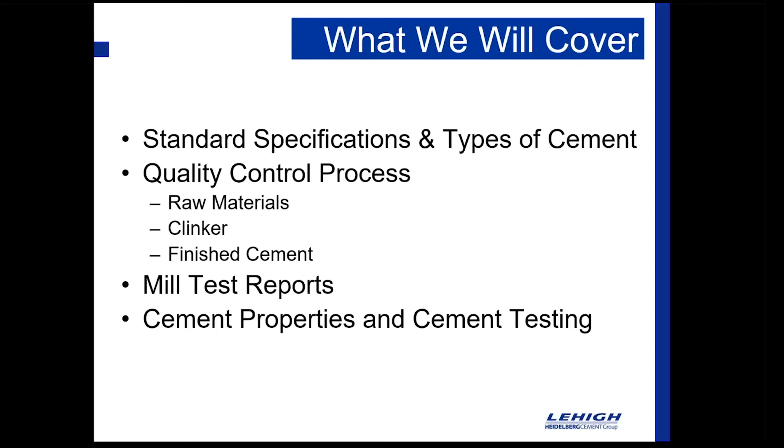So today, what are we going to cover? We're going to talk about standard specifications and types of cement. We're going to walk through the quality control process at a cement plant. And that's going to be kind of a 30,000 foot overview. And then I want to get into mill test reports just a bit and kind of break those down so that everyone can see the cement properties and cement testing involved in what comes out on that monthly mill test report that you might receive from your powder supplier.

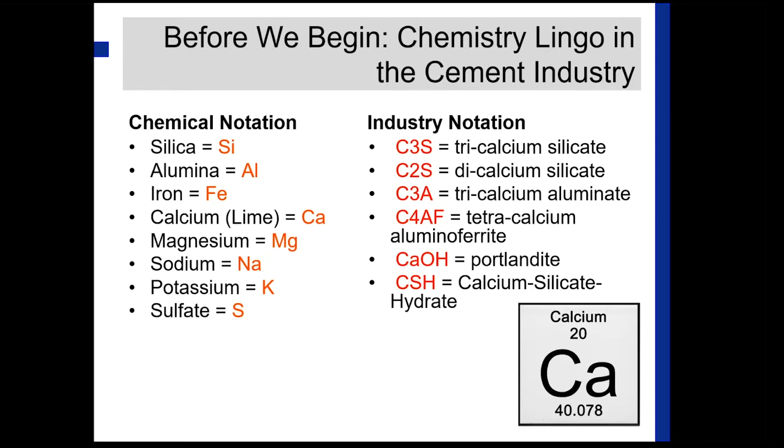Okay, so to get us kicked off, got a quick quiz. Portland Cement: A, was named after where it was first made in Portland, Oregon. B, was named after the hometown of the man who first patented it, who lived in Portland, Maine. Or C, got its name from a stone it resembled on the Isle of Portland off the British coast. And so if you said C, you are correct. Portland Cement gets its name from a stone it resembled on the Isle of Portland off the British coast.

And so with that, we'll jump right into standard specifications and types of cement. And to do that, that means we're going to step into the world of ASTM for a bit, specifically going to look at ASTM C150, the standard specification for Portland cement, ASTM C595, the standard specification for blended hydraulic cements, and then ASTM C1157, the standard performance specification for hydraulic cement.

So as we look at the different types, starting with C150, ASTM defines Portland cement like this: a hydraulic cement produced by pulverizing clinker consisting essentially of hydraulic calcium silicates, usually containing one or more of the forms of calcium sulfate as an interground addition.

Now, at the end of the day, I'm a pretty simple guy, and I understand things best when I can put it into street language. So what ASTM is telling me here is that Portland cement is a powder made from grinding clinker and gypsum, and that powder gains strength when it gets wet.

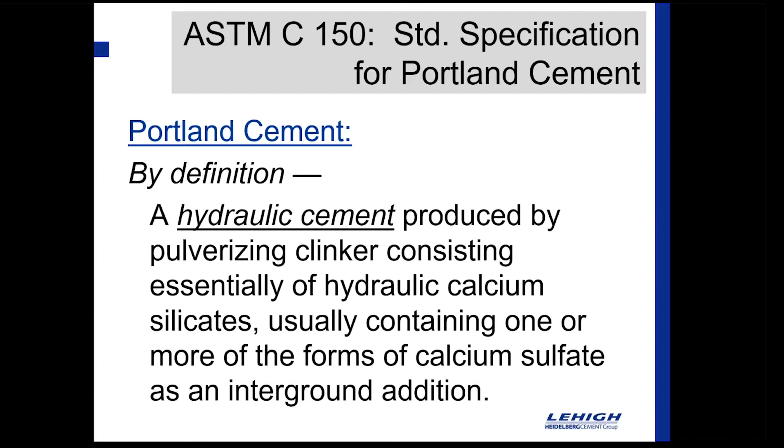Within C150, there's 8 main types of cement, and we also have, in addition to that, type 1-2 cement. So we have type 1 cement, which would be called normal cement, type 1A, normal air entraining, type 2, moderate sulfate resistance, type 2A, moderate sulfate resistance air entraining, type 3, high early strength, type 3A, high early strength air entraining, type 4, low heat of hydration, and type 5, high sulfate resistance.

I've been with Lehigh 32 years. When I first started at our Mitchell plant, we did make an air entraining cement. So what that meant was when you bought the powder, you didn't have to put air entraining admixture in - it already had that built into it. But as specifications became more diverse and there were different air ranges you might want to provide concrete to meet, that kind of fell by the wayside. It's probably been 30 years since we made a 1A cement here at Mitchell. So you don't see those much anymore, but it's still something that's discussed.

So these are the 4 main types of cement we might see in this Indianapolis, central Indiana, southern Indiana, northern Indiana area: type 1, type 2, type 3, and again that type 1-2 cement that offers the performance of both type 1 and type 2. So those would be the main ones that we would deal with.

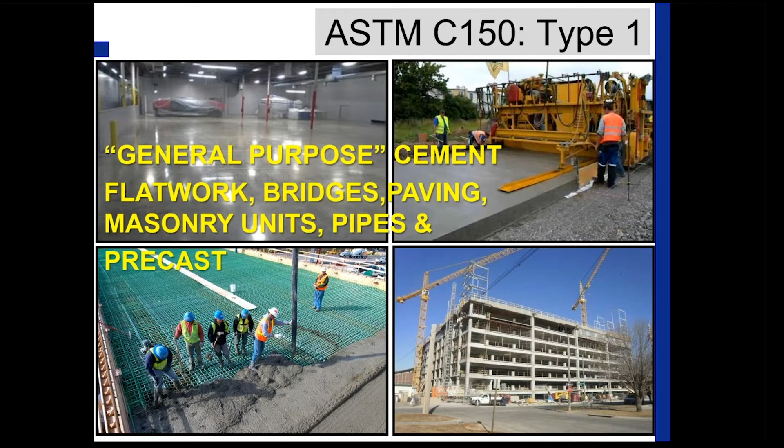Just looking at some general applications for some of these cements to refresh our memory. Type 1 would be more of a general purpose cement, used in flat work, bridges, paving, masonry units, concrete pipe, precast. Any of those applications might be suitable for a type 1.

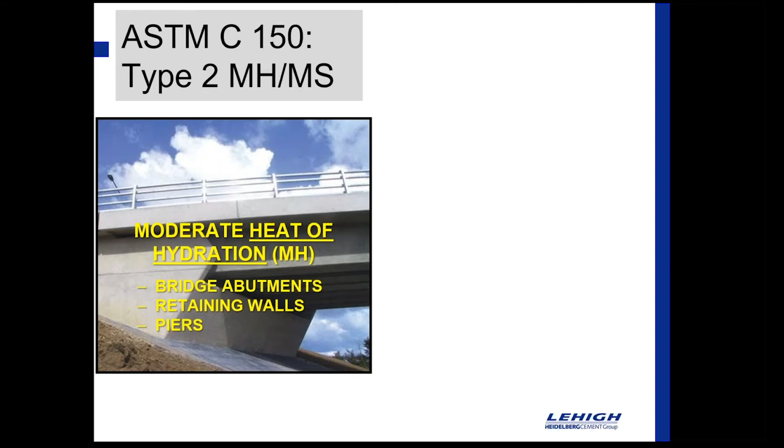In terms of type 2, it can be a moderate heat or a moderate sulfate cement. For moderate heat, you might see that in bridge abutments, retaining walls, a concrete pier, something like that, where you're getting into more of a mass concrete situation. But you might also see a type 2 specified on a project where you need moderate sulfate resistance - any kind of drainage structure, sewage treatment facilities, wastewater treatment plants, something of that nature might call for a moderate sulfate cement as well.

And when we're talking about type 2, typically we start to think about that C3A, the tricalcium aluminate phase. The content of that C3A is the main control factor with type 2, and it's limited to 8% maximum. We'll unpack that when we get to the mill test section.

Type 3, high early strength cements, absolutely something we're starting to see now put into application this time of year with cold weather concrete. Also a lot of precast pre-stress where forms need to be removed quickly. Post-tension concrete could be a type 3 use. Any kind of pavement that's fast track or a high traffic area that needs to be put back into service quickly, or a lot of times we'll see even concrete masonry products, especially when that has to be turned around quick or we're concerned with chippage on corners or fine detail work - that might be a place for type 3.

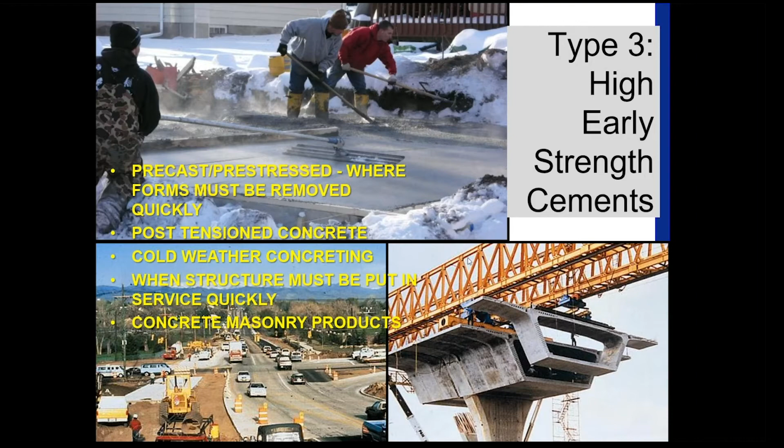And then type 4 is a low heat cement. This is a situation where we're concerned with the heat generated from the overall mass of the concrete, where thermal cracking becomes an issue. We can limit that amount of heat generation by the use of a type 4 cement. Bearing in mind that mass concrete, according to ACI 301, suggests that a concrete member with a minimum dimension of 4 feet should be considered mass concrete.

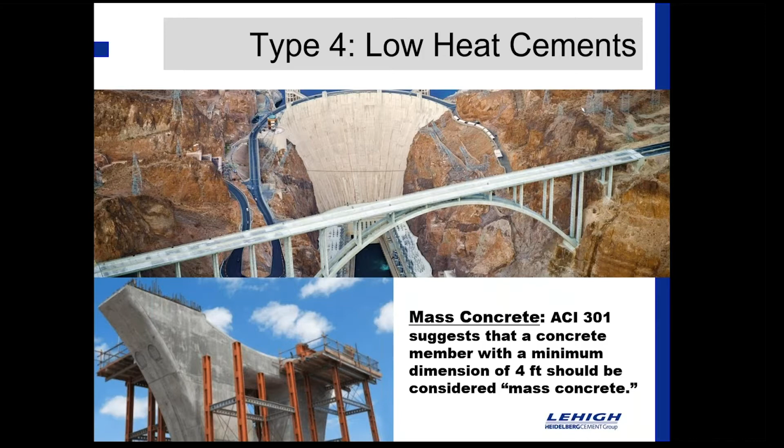Type 5 is a high sulfate resistant cement. This would be something that would be especially prevalent in the Southwest United States, where there's an abundance of sulfate in the soil. Could be something used around saltwater where we might have exposure in that environment.

And I take that pretty seriously. So here's a picture of my wife and I. And if you've ever been to Key West, I bet you got a picture just like that where you're at the southernmost point. And if you've ever done that, you know that there's a really long line to step up there and get your picture. Like we waited almost an hour and a half in the heat down there one day to get our picture.

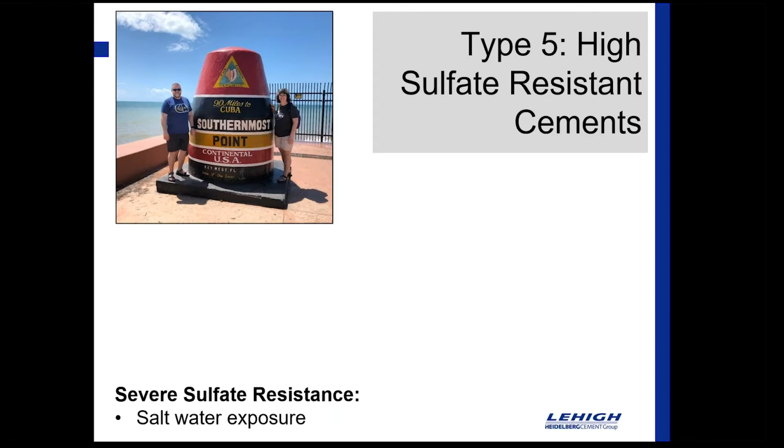So if you're also like me and you're kind of a concrete nerd, you spend a big part of your vacation walking around with either your head down looking at the concrete or you're looking at the concrete poured around you. And so that's what I'm doing as I'm standing in line. And so what I found was that the overspray, when the waves get kind of stirred up and it can get a little rough around this southernmost point, you could see on this concrete light pole where the expansion started to really kick in, and they tried putting metal bands around that to hold it in the best they could, but there was entire sections where the concrete was just gone.

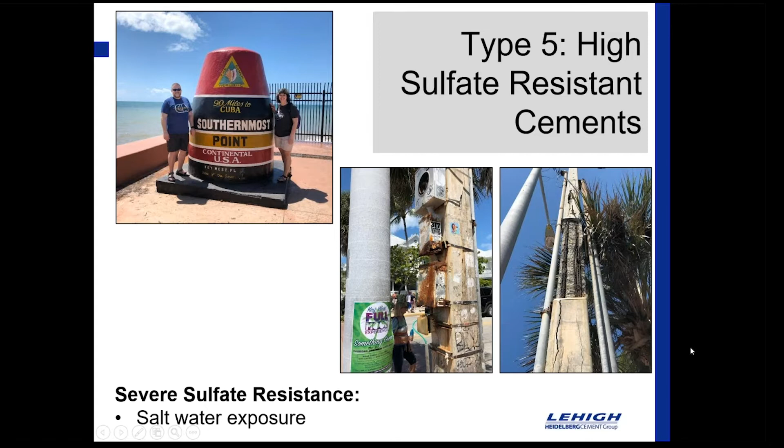The good news is they're replacing those. You can see there, on the pole on the left of the first picture, that they're actually trying to replace those. So I don't know how many times I've run into buildings because I've walked around with my head down, but if you're like me, you've done that before.

Just real quick while we're in the neighborhood, thought I would just mention white Portland cement. And you can get a white Portland cement in either a type 1 or a type 3. And the whiteness is a function of chemistry primarily, very, very low iron content. It's a special process, a special kiln. Not every cement plant can do that. So it tends to be a little more expensive because it's a matter of scale and a little harder to get. So it's a supply and demand issue. But again, just a function of the iron content, and we'll talk about why that would be the case here in just a bit.

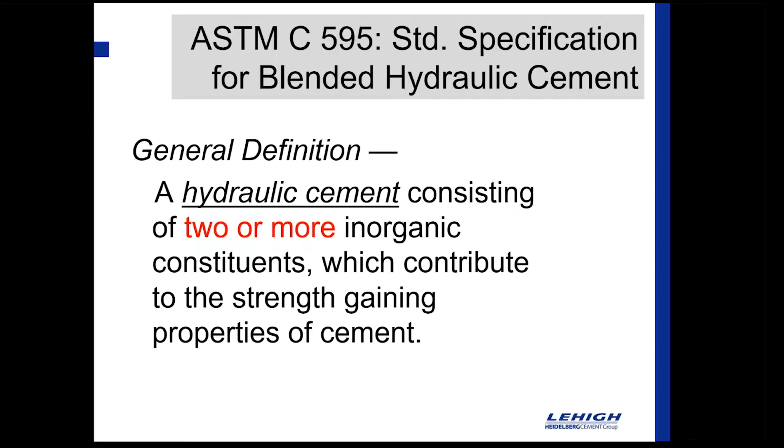Okay, so let's step into ASTM C595. That's the standard specification for a blended hydraulic cement. And the text definition says a hydraulic cement consisting of 2 or more inorganic constituents which contribute to the strength gaining properties of the cement. And so when we're looking at C595, we could be combining our clinker with gypsum, Portland cement, limestone, fly ash, slag, silica fume, calcined clay. So we're taking 2 things now from an inorganic perspective and blending those or intergrinding those.

And why I think it's significant to do that from a cement producer perspective is because when we make it on our end, when the cement producer makes this blended cement, we're optimizing the SO3 content. And that's really important because the SO3 that cement brings to that concrete mix, I think it helps us to understand we're talking no longer about constituents, we're talking about a system. So our concrete becomes an overall system where there's different components working together. And so the cement brings SO3 to that mix when all those things go into solution. And we're asking that SO3 to control a lot of different reactions. And so the cement producer is going to optimize that SO3 content on his end. And that is something I think that's going to be of benefit to controlling consistency of mix performance down the road.

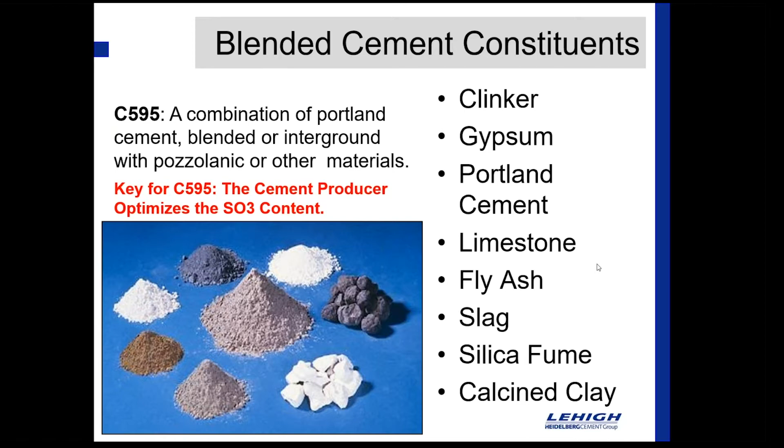Looking at C595, again, blended hydraulic cements for general concrete construction. There's type 1L, which is a Portland limestone cement. Type 1P, a Portland pozzolan cement. Type 1S, Portland slag cement. And type 1T is a ternary blended cement. So we can actually blend more than those 2 items.

And I wanted to just take a second and talk a bit about type 1L Portland limestone cement because unless you've been living in a cave for the last year or so, it's become more and more prevalent to hear about the green world. And so green concrete is a part of a greener world that we're all living in. And so I wanted to talk about a way that we can address that from our industry. So looking at Portland limestone cements, they are, again, called out by C595 and AASHTO M240. To make a Portland limestone cement, you can have a limestone addition rate of 5 to 15% limestone.

They've got a pretty long history of use, started in Europe in the mid-60s. Canada kind of jumped on board around the start of the 2000s. And then the US jumped in earnest probably sometime between 2005, 2010, but really very prevalent from 2010 on.

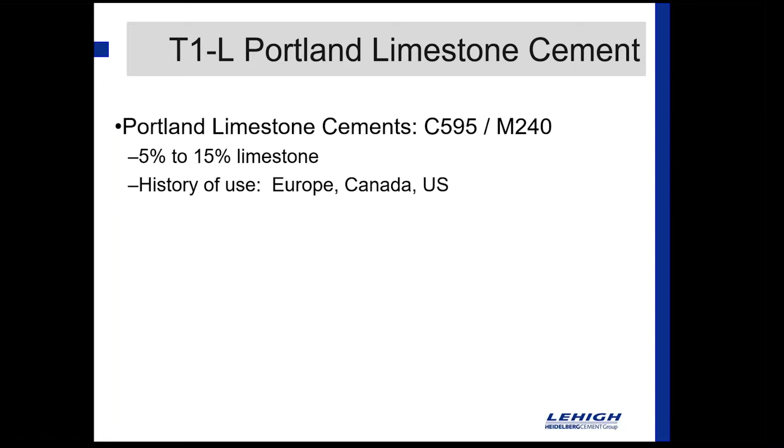There's a few different mechanisms as to why Type 1L Portland limestone cement works. Three of the primary are particle packing, nucleation, and chemical reactions. And when you use a Type 1L cement, what we have found from our testing is that you can pull a Type 1 or a Type 1-2 cement out of your mix and typically replace that at a 1-to-1 rate with a Type 1L, and you're going to see equivalent or perhaps even improved performance in just about every category that would be of concern to a producer.

And really, the highest benefit, I think, going forward is that using Portland limestone cement provides an option to make greener concrete. There's a potential for 10% reduction in CO2, and that's all accomplished without any special system or addition to a ready mix plant. There's no hardware that has to be installed or anything like that. It's simply swapping your powder out from a Type 1 or a Type 1-2 and replacing that with the Type 1L cement, and you begin to realize that 10% reduction.

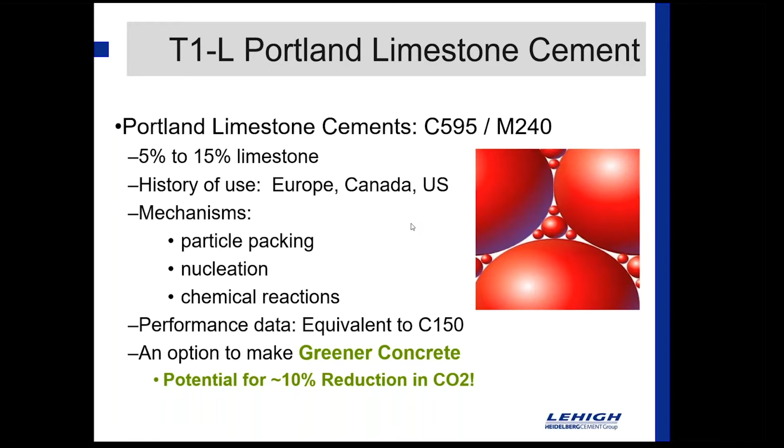And so you end up with a higher fineness material, but that higher fineness doesn't change the overall water demand or slump performance of that concrete. And a good benefit of that fineness increase is that the higher surface area of the fine limestone provides surfaces for silicates to form and grow through a process called nucleation. So essentially it gives more places for that hydration reaction to begin to start.

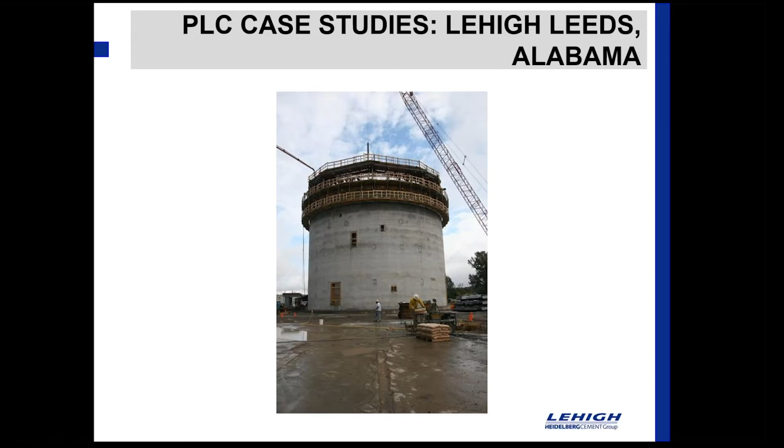Wanted to talk about a couple of case studies with Portland limestone cement. One is at Lehigh's Leeds, Alabama plant, and in 2008, we poured a new silo there. It was made out of a PLC slag combination. And so wanted to share some data from that.

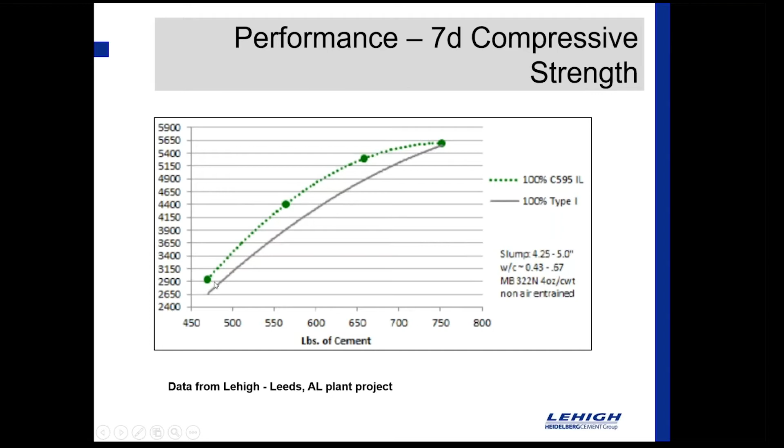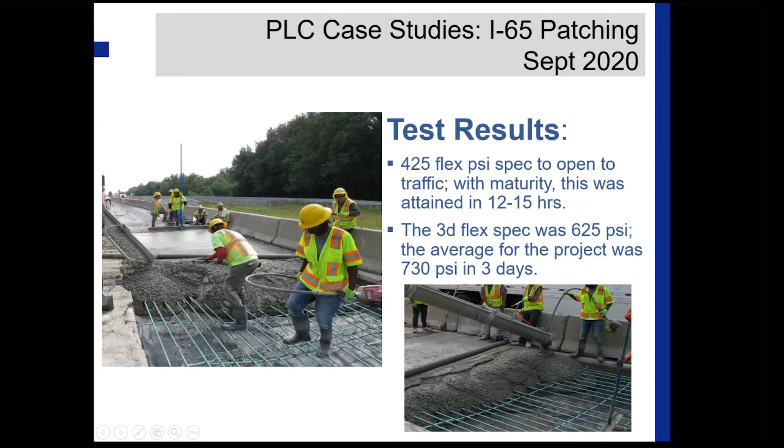A little closer to home, we had a project back in September of 2020, just a few months ago, on I-65 patching, where some Portland limestone cement was used, and that with some good performance, I think. So we saw a 425 flex PSI spec to open to traffic with maturity that was reached in about 12 to 15 hours. The 3-day flexural spec was 625, and the average for that project was about 730 PSI in the 3-day break. So again, I think you see a little bump on that early side that tends to be very beneficial with the Portland limestone cement.

And then just from Lehigh's perspective, I think most of you might be familiar with the fact that Lehigh's going through a $700 million expansion at our Mitchell plant. We're so confident in Portland limestone cement that about 95% of the structural concrete that's going to be placed for that is going to be Portland limestone cement.

And so I wanted to share some things that we've learned from some testing at our concrete lab in Mitchell, Indiana. And these are just some generalities that we've discovered, some trends across different testing, different plants' production, as we've looked at this from 4 different Lehigh plants now. So in terms of strength, again, a slight bump at 1 day. Typically, those tend to moderate a bit at 7 and 28 days and equal more of the Type 1 or the Type 1-2.

What's been interesting, water demand is the same as type 1-2 or even reduced a bit. And we've seen slump loss improved in most cases, and workability is extended. We ran slump loss out to about an hour and saw that typically showed some value or some promise there with the PLC. Set time at 70 degrees has been neutral within about a plus or minus 15-minute window versus type 1-2 cements.

Admixture dosages in terms of water reducer, that's been almost 1-to-1 straight up across the board. Air entrainment, because of the fineness of the PLC, you might need another quarter to half ounce, maybe something like that, of the air entrainer dosage rate. That may need bumped slightly.

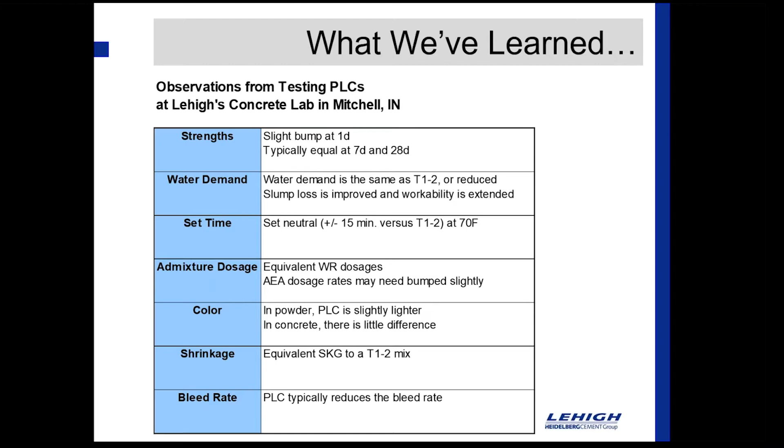Shrinkage has been nearly equal, dead on equal with the type 1-2 mix, and something that we found to be a potential benefit is the PLC typically reduces the overall bleed rate. Again, I think that's a function of that fineness that we see.

Would encourage you, if you haven't seen this, PCA has released a separate website called greenercement.com. So that's greenercement.com, and they have more information than you can shake a stick at here in terms of just overall PLC, why it works, why it can help with durability, resilience, and giving you that 10% carbon reduction overall. So great website to hang out, get a lot of questions answered if you have any more about PLC.

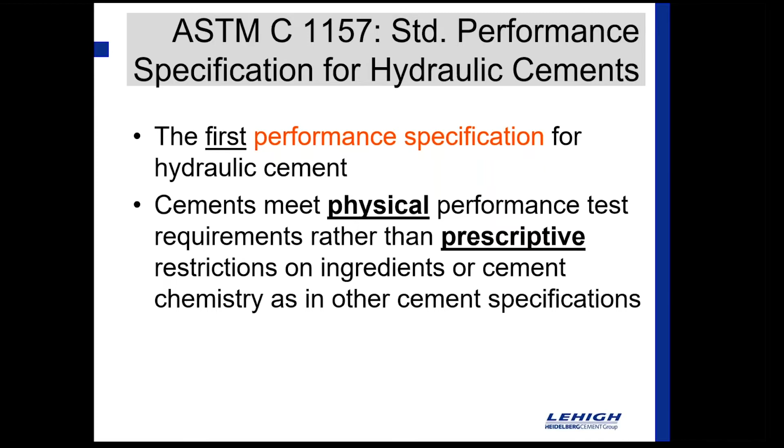Okay, so let's jump back into our types of cement, and we'll talk about ASTM C1157, Standard Performance Specification for Hydraulic Cements. So 1157 is the first performance specification for hydraulic cement, and now we're talking about a cement that meets a physical performance test requirement rather than the prescriptive restrictions that we're used to on ingredients or cement chemistry that we might see in C150 or C595. And so again, we have our 6 types. We've got type GU, which is general use.

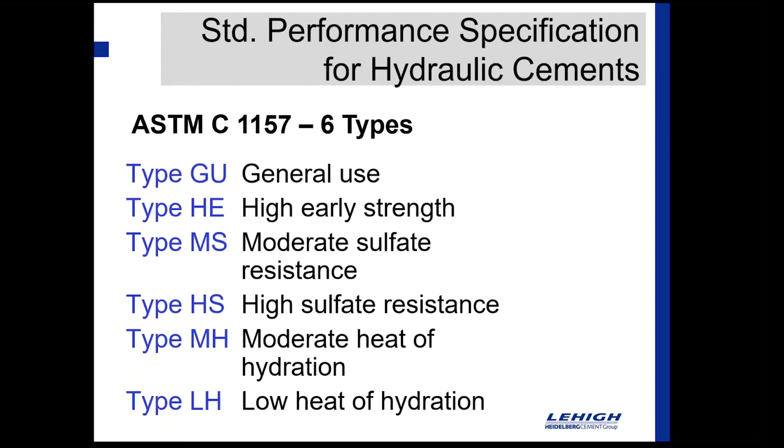And what you begin to notice is that the 1157 cements kind of have their C150 counterparts. So type GU general use is roughly equivalent in terms of performance to just our everyday type 1 cement. Type HE, high early strength, again, similar to the performance we would get from type 3 cement. Type MS, moderate sulfate resistance, and type MH, moderate heat of hydration. Again, that's your type 2 cements and so on.

And so we can kind of break it down like this, that when we look at C595 versus C1157 cements, C595 is prescriptive, so that specifies what the cement must be. In other words, there's going to be certain limits on chemistry or components of that chemistry that you have to maintain either over or under, and then there may be things like physical characteristics like the fineness limit that you've got to bear in mind as you're producing the cement.

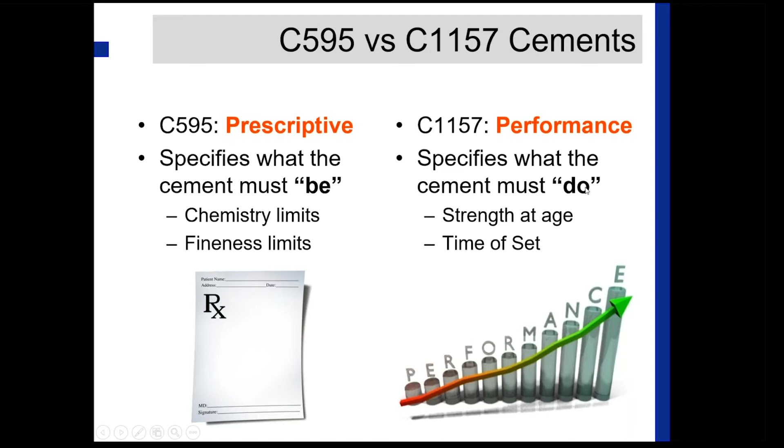But when you look at C1157, again, it's a performance specification, so that specifies what the cement must do. In other words, we don't care how it's made necessarily. We don't care what you had to do to make this powder to get it to do whatever it does. We just want to make sure that it reaches maybe a certain strength at a given age or a time of set in a certain time frame, whatever it might be. So it kind of frees up the producer to make a powder that's going to meet a certain performance criteria, not so much follow a cookbook recipe.

So I wanted to jump out of cements and look at quality control in cement manufacturing. Really, each step in this whole process is important in determining the properties of the finished cement. We start analyzing all the way back at the raw material selection stage. You go to raw feed, then to actual clinker, to the fresh cement, and then wrap up your testing with the shipping and field samples.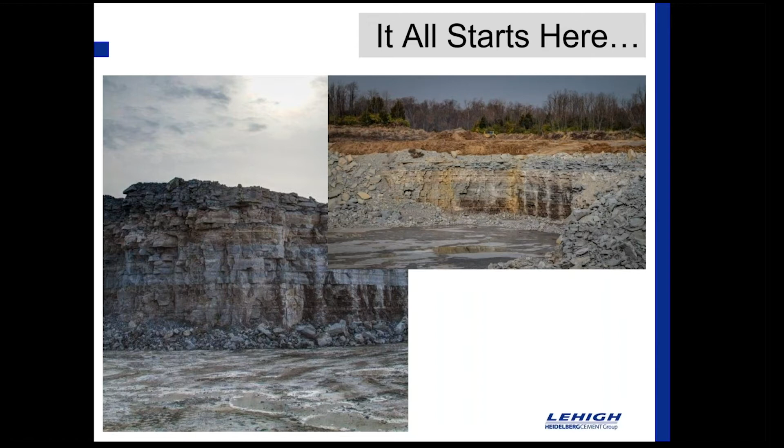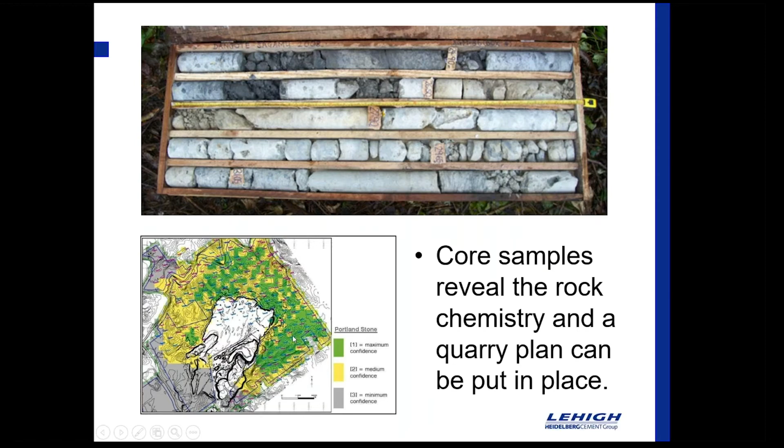One way that we do that is to take core samples, where they drill down through the rock and pull out these core samples, and that can reveal the chemistry as they go down through different layers of the sediment. And then a quarry plan can be put into place. You see at the bottom left here a map of a two-dimensional quarry plan, and that would be how the cement plant would choose to expand and bring material up for use in the cement manufacturing process.

Because of the evolution of technology, it allows some cool things. Now you can leave that world of the two-dimensional map, and you can actually make three-dimensional quarry maps. This can even allow for more precise mining and extraction of the limestone from the quarry, so that you get the material you need to make the quality of cement that you're shooting for.

Every time I give a plant tour, one of the questions I'm always asked is, can we see a quarry shot? Well, A, those don't happen as much as you might think, and B, there's no way that we can take a visitor there and be safe, at least while meeting our insurance quota. So what I've tried to do is bring a shot to you. This is a shot of a quarry.

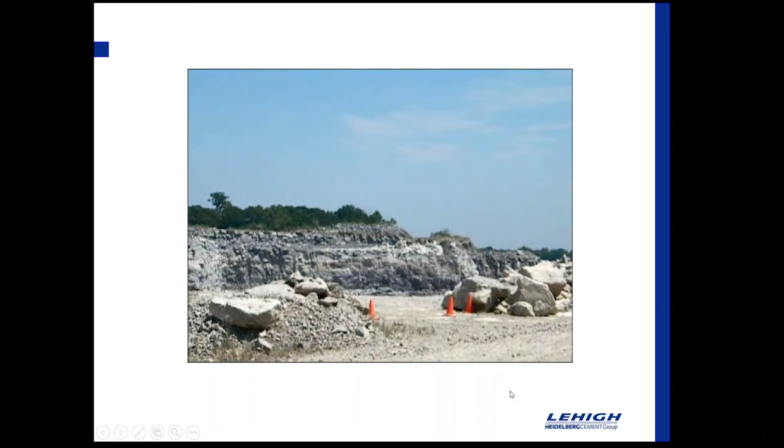I don't know if you can hear that guy saying do it again, but he's pretty fired up by the whole process.

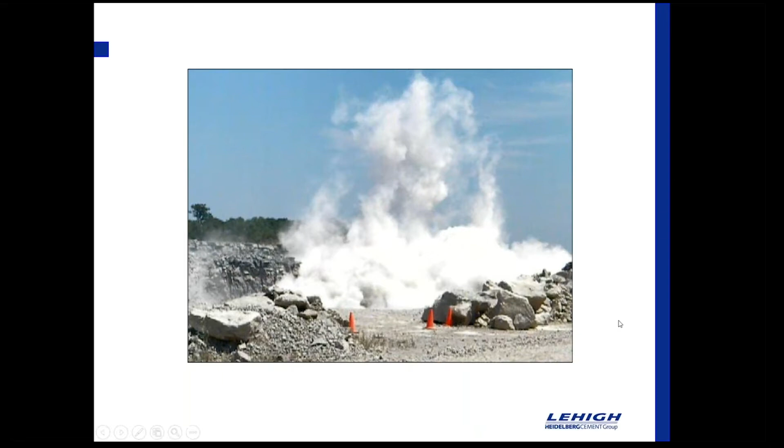Once we've got our limestone, that is the key ingredient to move us toward understanding the four principal oxides that make up our cement. There are four that are in particular needed. Calcium oxide, and these are just rough numbers, 64%. Silicon oxide is about 22%. Aluminum oxide, somewhere in the neighborhood of 6%. Iron oxide, about 3%. Those would be the major components that are required before you can make cement.

And then there are some minor components in the process: alkalis, sulfur, magnesium, and titanium. Where you get those four major components can come from a variety of different places. You might get your calcium around here. Like I said, primarily it's going to come from limestone. That's why you see cement plants in our area, because we're blessed with a lot of limestone deposits.

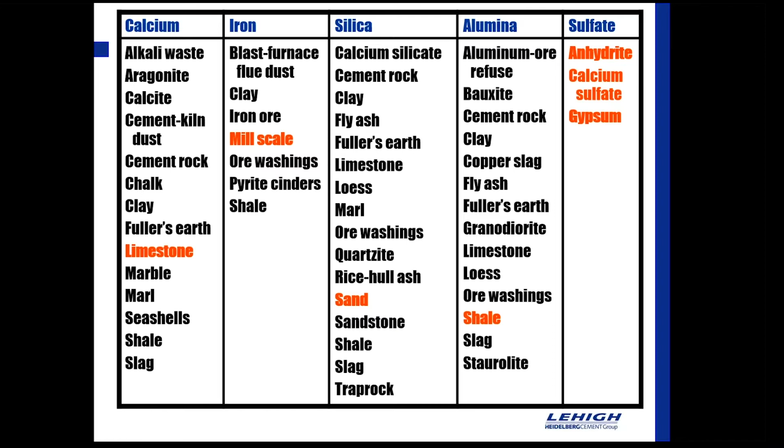Iron can come from different places. I've seen it come from pyrite and mill scale particularly. Silica, again, primarily sand. The alumina source, at least in the Mitchell plant, is shale. And sulfate can come from either pure gypsum, anhydrite, calcium sulfate, whatever that might be. You have to have that sulfate, and we'll talk about why in just a bit.

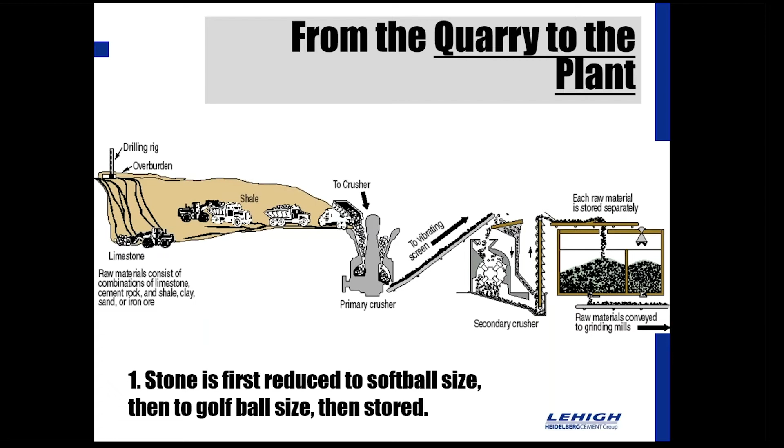When we take that rock from the quarry to the plant, we first reduce it to about softball size, then down to golf ball size, and then it's brought to the plant where it's stored. Once we have it stored at the plant, we take limestone, sand to give us the silica, something to give us our alumina source, and then an iron source. We take those four things and blend them. They're ground, and at that point we really start to control the chemistry. They're ground specifically to a fine powder, and then that material is ready to go into the kiln.

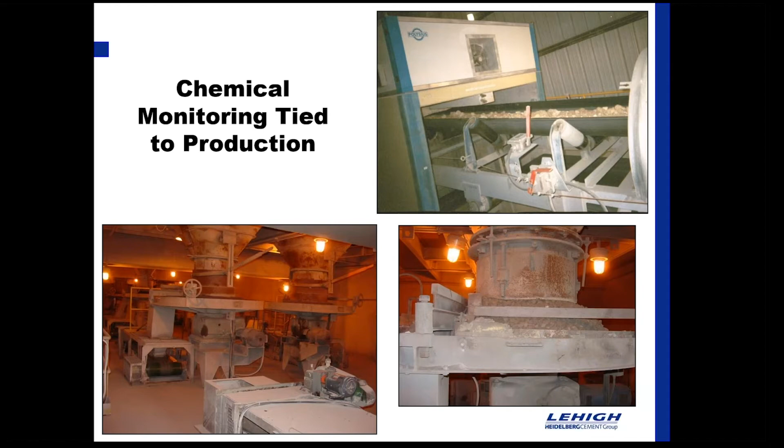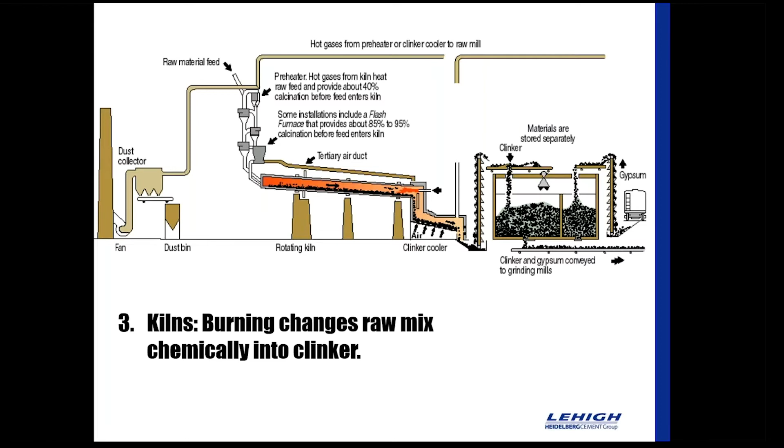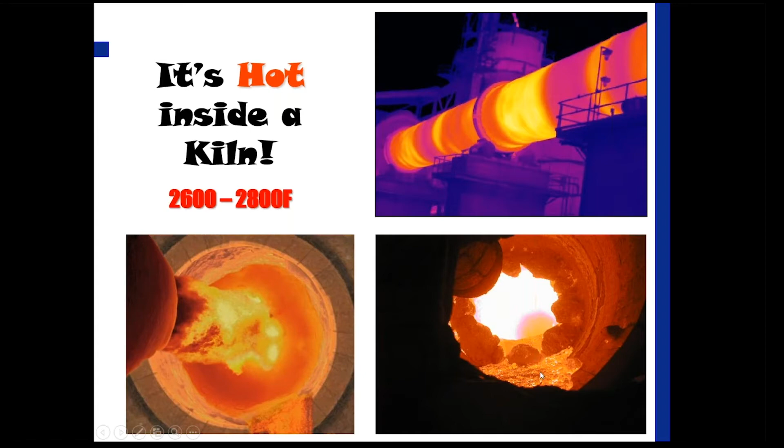And so once the material goes into the kiln, that's where things really start to change. Burning changes that fine gray powder chemically into clinker, and we'll talk about what that is. Inside the kiln, it's hot, anywhere from 2,600 to 2,800 degrees Fahrenheit. In the bottom right picture here, you can see that our fine gray powder almost starts to look like lava as it comes down through there. Basically what we've done is disassociate all the chemical elements into their free nature, and now we're going to see some recombining of that as this material solidifies after being melted.

When clinker comes out of the kiln, it passes through a cooler, and that cooler tends to freeze or lock in the silicate mineral growth. We don't want those minerals to grow too big, because we want the reactivity from a smaller, well-defined clinker crystal, a silicate mineral. Typically clinker is about 5/8 of an inch, which the old guys at the plant will tell you is an ideal size for a clinker nodule. Then those go into internal storage. We want to store our clinker inside and keep it free from moisture.

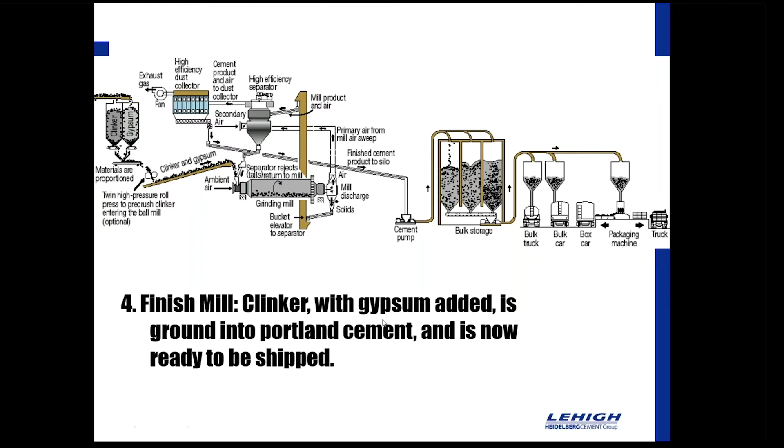From there, we have clinker that we produce, and now we add our gypsum, and that gypsum is added to moderate the set of the cement once it's added to water. If we didn't have gypsum when we ground our clinker, it would just flash set, and it would be of no good to anybody. So at this point, clinker with gypsum added, about 5% roughly, goes through finish grinding, and from here we come out with our final cement. Once we have our cement ground, it goes to the different silos, and from the silos, it's either bagged or put into rail cars or tankers and then delivered to the actual producer.

Let's talk about the cement properties and cement testing a bit. Some things we want to talk about here: we'll start with mill test reports, then move into chemical properties and the standard properties that we look at from a cement manufacturer standpoint in terms of chemistries and physical tests. Then we'll wrap up with some other properties and tests that might be available.

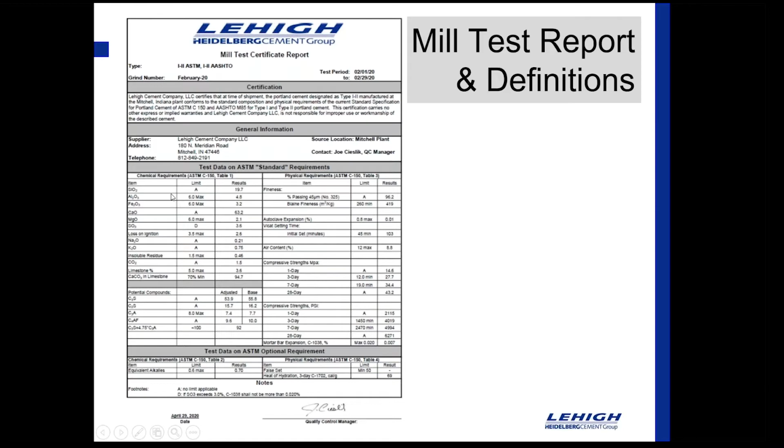This is something you might think about for later. What is it you typically look at on the mill test? What is it that you, in your place in this industry, are concerned with? And if there's anything on that mill test you need more info on, we can certainly talk about that later. I can do my best to get you some follow-up information.

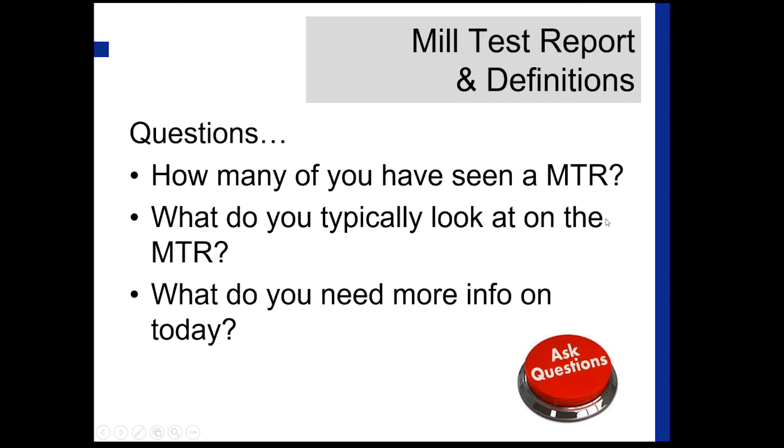When we talk about the standard chemical properties of cement, there are some routine tests that we're going to do. Those include oxide analysis, loss on ignition, insoluble residue, potential compounds, and equivalent alkalis. You'll find those, at least from a Lehigh perspective, listed on the left side of the mill test report. We're just going to walk through those and see where those come from, top to bottom.

At about 2 or 3 hours, I can give you a pretty solid, accurate breakdown of the oxide composition of that cement. But in 2 to 3 hours, there's been a lot of cement made, because those mills don't stop while I'm in here running this chemical analysis.

So what just about everybody would do these days, they do X-ray fluorescence for their chemical analysis. This is where we could take that same cement powder, and in about 5 or 10 minutes, we're going to be able to give you a very accurate, highly calibrated breakdown of the composition. So that's where your oxides are going to come from in terms of data generation - X-ray fluorescence.

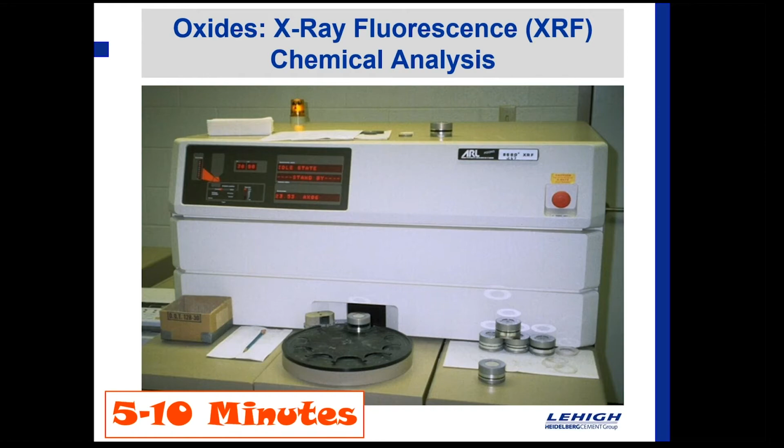Once we have those oxides calculated, then we can start to do some calculated value work and put together the potential composition using the Bogue equations, based on the oxide data we generated. That's where we start to hang numbers on things like C3S, tricalcium silicate, C2S, dicalcium silicate, C3A, tricalcium aluminate, and C4AF, tetracalcium aluminoferrite.

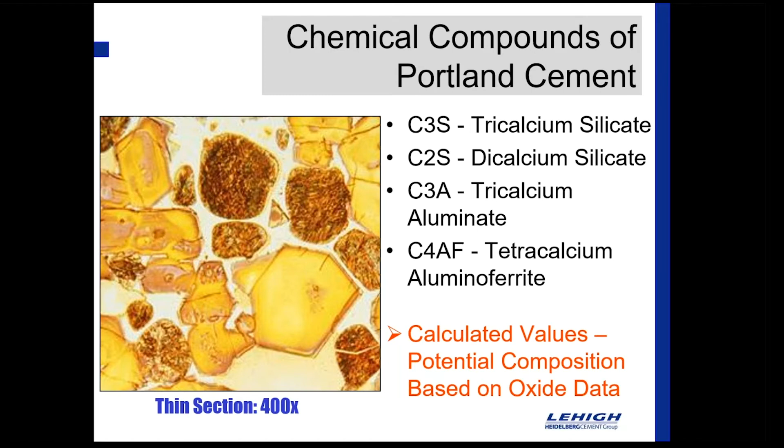That sounds okay, but what does that really mean? When we talk about how those particular minerals might impact our cement and its performance - C3S, often called alite, contributes primarily to early strength gain, 1 to 7 days. As C3S goes up, you could expect to see an increase in heat of hydration as well.

C2S, often called belite, primarily contributes to later age strength, looking at 28 days and beyond kind of strength gains. Not a lot of heat from C2S early on, but that's where you get that kick you're used to seeing at 28 days.

C3A, or aluminate, contributes to very early strength gain, 1 to 3 days. This is a source of the initial heat of hydration. And if this gets too high, you can impair your resistance to sulfate attack and lower the durability of the concrete that would be produced if C3A is not controlled.

C4AF, or ferrite, has little overall effect but does affect the color. Higher levels of iron - if you see a mill test with abnormal, high iron content - would mean you're probably going to see a darker cement. So if you've seen cements that are very dark, they've got a lot of iron; if they're on the light side, they might not have as much. But from a production standpoint, the ferrite does have a role in the kiln as it acts like a flux and helps everything melt more efficiently and completely, helping the overall clinker mineral composition performance.

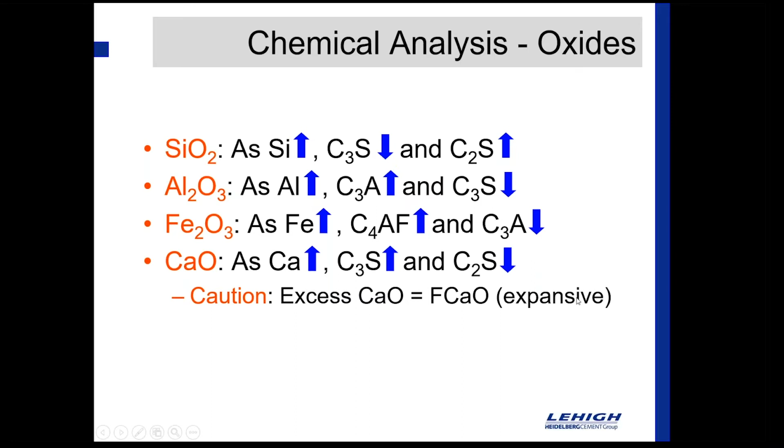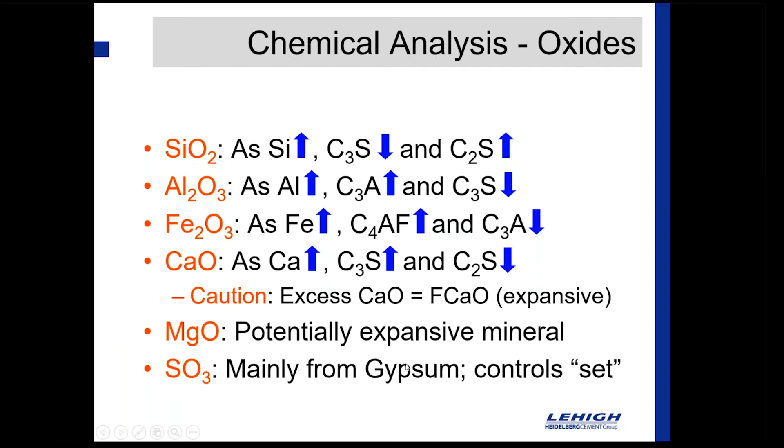And you can't do this just without consequence, because if you have excess lime in the mix, that's called free lime, and that free lime becomes an expansive mineral. And then just a couple other oxides and their impact on the overall cement performance. Magnesium oxide, potentially expansive mineral if that gets too high. And SO3, again, this mainly comes from the gypsum, and this is required to control set.

So if we continue down the left side of our mill test, we find the loss on ignition test, and that's determined by heating cement, then measuring the loss. So you just take a platinum crucible and you put in a 1.00 gram sample of cement, and you heat that at 900 C. And then after a specified time, you pull that out, cool it, weigh it again, and you're looking at that loss in the overall weight, what you started with versus what you end with after heating. And so typically you see that value somewhere between 0 to 5%.

Higher values indicate extent of prehydration and carbonation, and those can be caused by storage, could be caused by leaky storage. You might have a tanker truck that didn't have a lid snug down, or a rail car that doesn't seal properly, or maybe your silo has some kind of leaking system in it, or just overall contamination. Maybe the tanker carried something before cement that would be causing you an issue. In terms of where else you might see LOI data, anyone that deals with ready mix and buys fly ash, you're looking at LOI data on that material as well. And we know, higher LOI could be problematic.

Okay, in terms of equivalent alkalis, there's the table at the very bottom from the mill test report, and that's a measure of the total of the sodium and potassium alkalis that's recorded as Na2O equivalent on the mill test. And this is something that, effective in April of 2019, ASTM made mandatory on all mill tests to be reported. And what you found at that same time is that technically there's no longer a low alkali cement. We used to say 0.6% and lower in terms of equivalent alkalis was a low alkali cement.

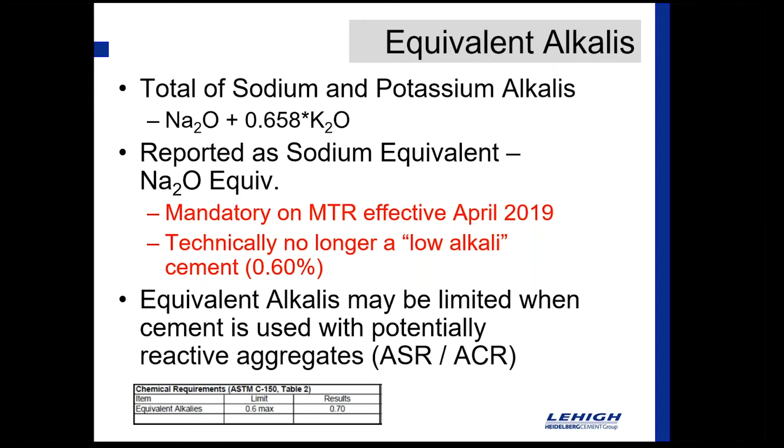And that's because at one point in time, we assumed that controlling the ASR, the alkali silica reactivity, used to be kind of up to the cement. If you had a low alkali cement, then a lot of folks thought you were good to go. But with the C1778 guide for reducing the risk of alkali aggregate reaction in concrete, the alkali loading of the entire concrete mix is really now what's considered when selecting the mix components. I don't think people that make a low alkali cement are going to stop making a low alkali cement, in my opinion, because that cement contribution to the overall alkali loading of the concrete is very significant. So I think if there was a need for it before, that need's still going to be there. It's just technically they no longer specify or call out that low alkali cement.

Insoluble residue is a measure of the acid insoluble material in cement. And the insoluble residue is a measure of how complete the reactions were in the kiln. Could also come from contamination. Like again, if that tanker carried something like fly ash before it had cement in there, that fly ash could raise the insoluble residue count in your cement sample and cause you an issue, perhaps with a state DOT or something like that.

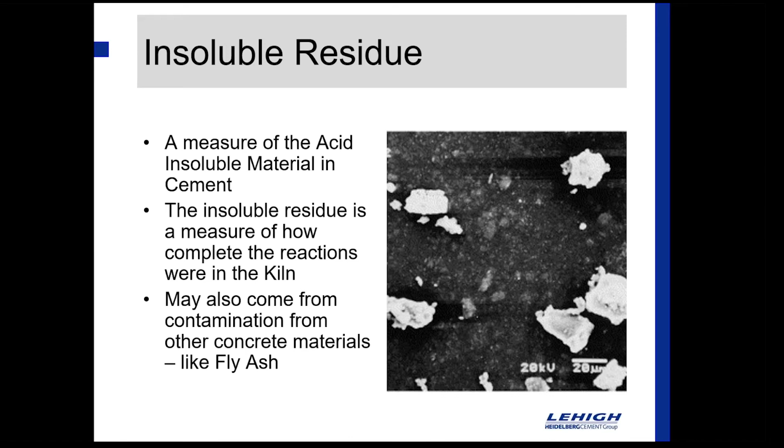I had to get a drink of coffee, sorry.

Okay, so let's move into some of the physical properties of cement. And here we're going to look at things like fineness, setting time, soundness, air content, and compressive strength. And so the first up is the measure of fineness. And one way that that's measured is the 325 mesh sieve or the 45 micron sieve. And here, again, we're just putting a 1 gram sample into that sieve.

And you've got to understand, when we talk about 325 mesh, it's not 325 mesh per square inch, it's 325 meshes per linear inch. So it's an extremely fine screen. If you poured water into that screen with no cement, the water wouldn't go through that screen. That's how tightly woven the screen is. So you have to have a high pressure nozzle to actually wash this material with. And so you're kind of blowing the fine cement through there, and you're looking at the amount retained. That's going to give you an idea of the overall fineness of that cement.

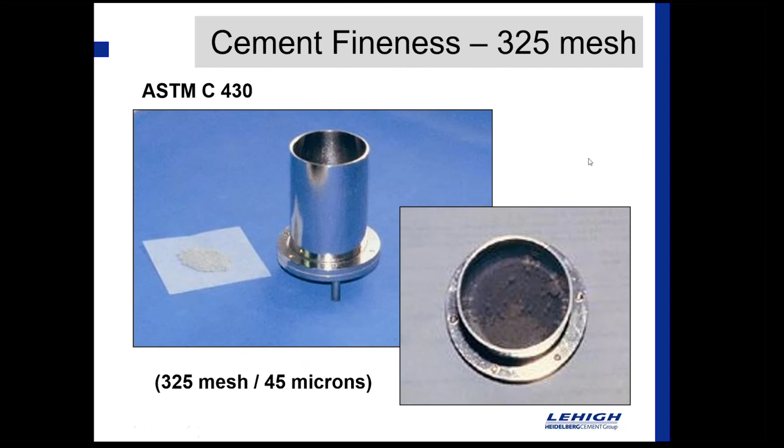We can also measure that same fineness by looking at the Blaine. That's ASTM C204. And here is the container, this middle picture, that you would place your cement sample in to drop it into the Blaine surface apparatus.

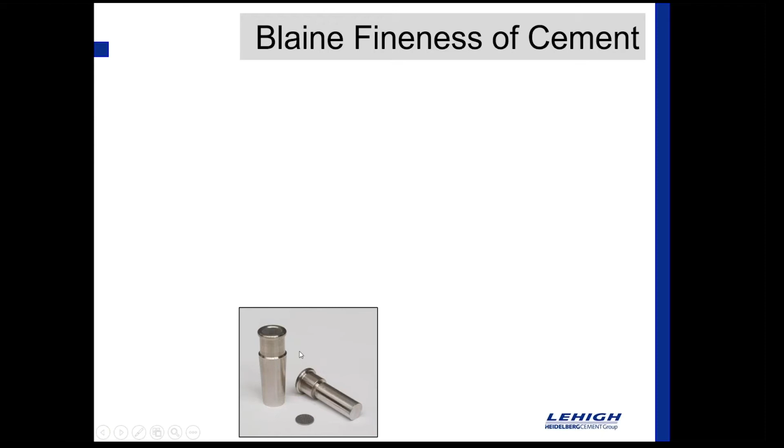And so here's how I kind of look at that. If I've got type 1 cement that I'm placing into that cylindrical test measure, then that's about maybe how big those particles are. If I was going to put type 3 in there, they're much smaller and they're much more tightly packed together. And so what happens is the air pulls through quicker in a type 1 than it does in a type 3. So a type 1 has a lower Blaine measure than type 3 does.

If you look at that from a cement model, or actually kind of a paste model standpoint, type 1 would be on the left here at a 0.4 water cement ratio, about 300 Blaine. And you can see there's some porosity involved here. We can see some water, some bigger particles in that computer model. When we jump over to type 3 at the same 0.4 water cement ratio, much denser, much more well compact. There's not as much porosity through that, and that's a 600 Blaine. So we doubled the Blaine there, and you can see the impact of that type 3 on the actual model performance.

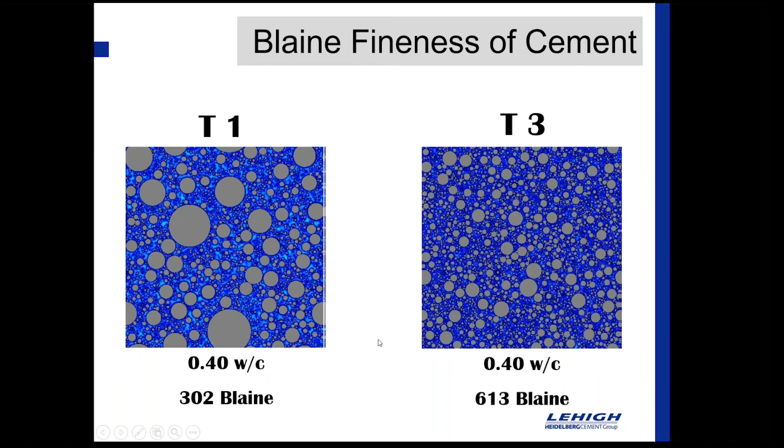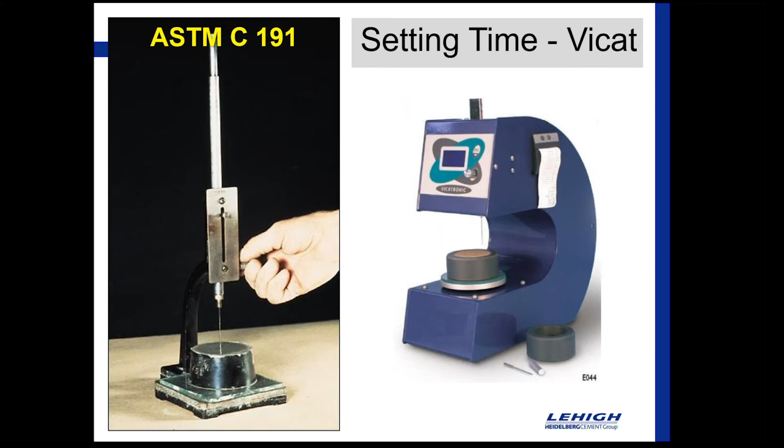ASTM C191 gives us the setting time information. And this, again, it's a time of set test for paste. Well, actually, we're making a mortar here out of this, and as the mortar stiffens, the needle will penetrate less. So that's what we're looking at, and there's a point in there where that would reach initial set. So I wanted to spend a couple of minutes and just kind of start to talk about setting times and types of cement and what this all means, and then kind of move this toward a practical application.

So again, I'm kind of a hands-on guy, and I like to visualize things that I can put my hands on, and it helps me understand things. So if I visualize my type 1 as a basketball, right, just a regulation basketball, I would find that the volume of that basketball is 448.9 cubic inches, and the surface area of that basketball is 283.5 square inches. So that would be my type 1.

If I looked at type 3, just kind of trying to visualize something, let's say a grain of type 3 would be my baseball. And so the volume of a baseball is 14.1 cubic inches, and the surface area of that baseball is 28.3 square inches. So what I find here is that 32 baseballs could occupy the same volume as one basketball. And so if that's true, then the equivalent surface area is 32 times 28.3, or 905.6 square inches of surface area. That's 3 times as much surface area for my baseball for the same volume that is occupied by one basketball. And so what that begins to tell you about type 3 is it's ground finer.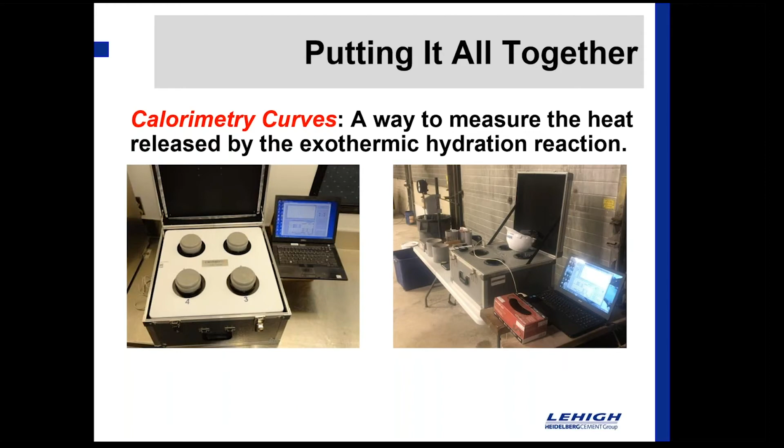And so that's what we expect, right? We pay for type 3 to get that higher bump in early strength. We expect that to be stronger earlier. Why is that? Because again, it's a function of surface area. So now there's more surface area of those individual cement grains for the water to get to and begin that hydration reaction. And again, that's why you see that steeper slope, because the reactions are starting to happen quicker.

And because it happens quicker, you start to see a need now for an increase in the gypsum content. So in almost every case, you're going to find that a type 3 would have a little more gypsum than that same company's type 1 cement. And that reason is because this reaction is going to happen much, much quicker, and you want to be able to control that. And so again, gypsum retards the set in that cement.

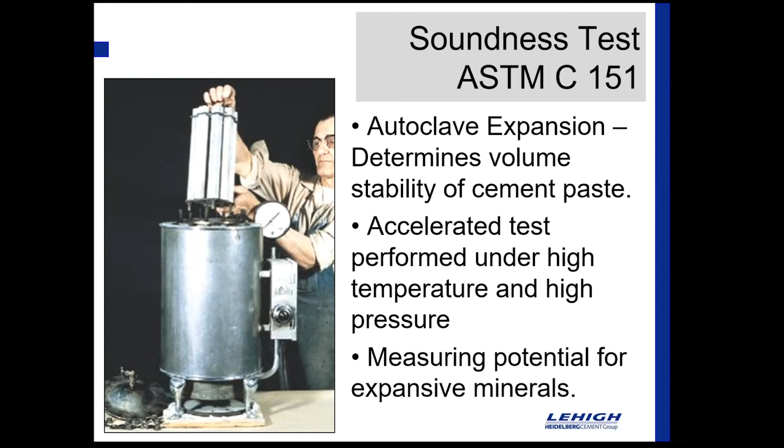Back to our mill test, the soundness test, it's an autoclave expansion test, and that's where we're trying to determine the volume stability of the cement paste. Basically, you're taking these mortar bars, making those bars and putting them into basically a pressure cooker, under high temperature and high pressure, which is going to accelerate any reactions that might be negative. Then you pull those bars out and measure them, and you're measuring the potential for that cement in terms of expansive minerals. So there's a measure for that on every mill test report.

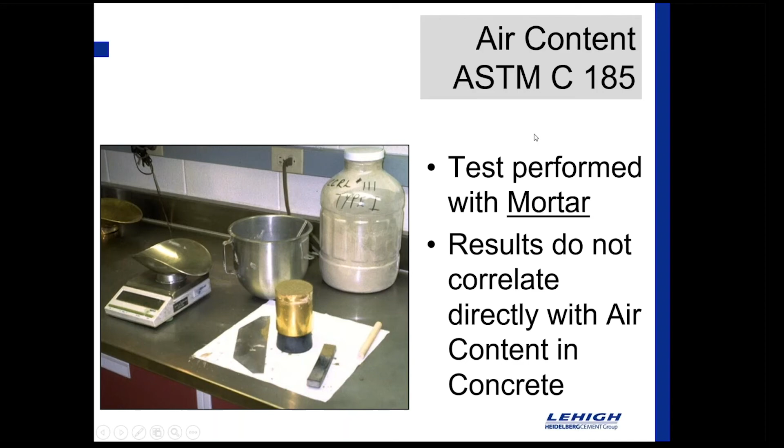Air content is ASTM C185. This is a test performed with mortar. It's always important when you see this test that you remember that these results do not correlate directly with air content in concrete. It's not a measure of entrained air, it's a measure of entrapped air. So again, when you see that 8% or whatever it might be on there, don't panic and think that you've got air in your cement.

Okay, so I think when everybody looks at a mill test report, their eyes just kind of drift to that right-hand column, and they want to see how strong is this cement? What's the cube breaks? What's the mortar cube strength? And that's ASTM C109. So you take a 2-inch cube, you make those, break those at 1, 3, 7, 28 days, and that's reported on the mill test.

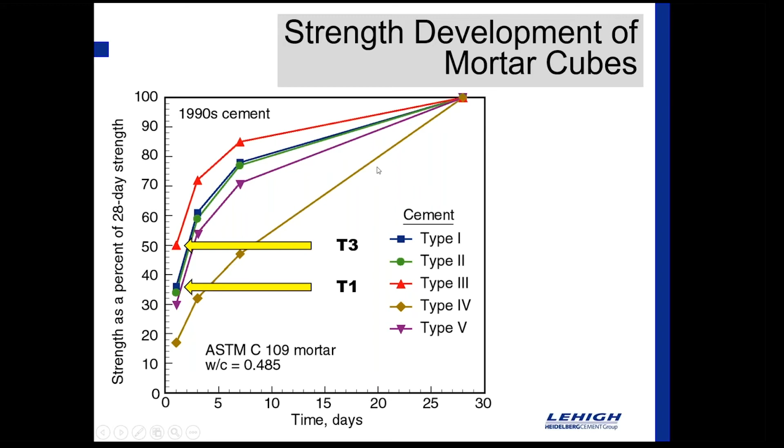And again, here's an old PCA graph that actually takes some of that data and shows you how that responds in terms of type 1 versus type 3. And again, this is why you buy the type 3, because you get that initial bump, about 15% bump in overall strength, but it tends to moderate a bit as it goes on. And a lot of times that type 1 might close that gap as your 28-day period goes on. So those are the standard tests that really every cement plant laboratory would run.

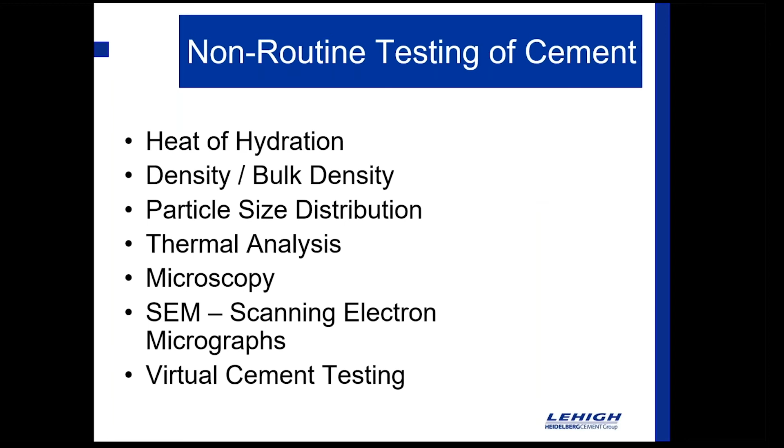There's some non-routine testing that can be done in terms of heat of hydration. That's ASTM C186. And there's a couple of data pieces here: type 2 generates about 70 calories per gram, and type 4 would do 60 calories per gram. That makes sense. If you remember, we've got a moderate heat cement in type 2 and a low heat cement in type 4.

And then PCA threw some data together. This was a graph of a bunch of 1990 vintage cements where they compared to a type 1 cement at 100%. This gives you an idea of just how those different cements might perform in a heat of hydration test. Type 2, type 4, obviously lower. Type 3, again, we expect it to be a little hotter, and it was at 106% of the type 1.

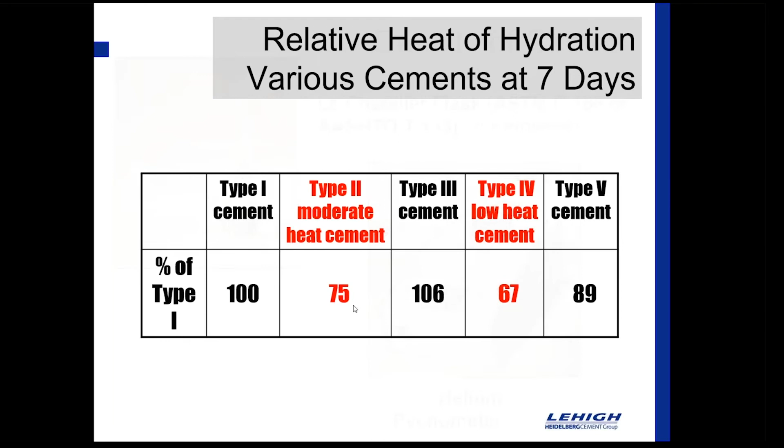Density of cement could be measured a couple of different ways. There's either the Le Chatelier flask or the helium pycnometer. And so why is that important? The cement density is used every single day in mix design calculations.

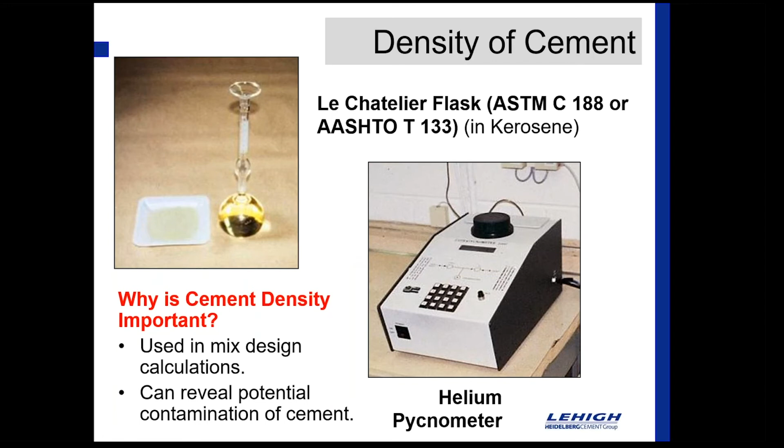And if that varies, that can also just give us a good heads up that we might have a potential contamination source of cement. Just in the everyday calculations for the work that we do, we accept 3.15 as the tried and true number for your accepted density. I know some guys are doing 3.14. We stick with 3.15.

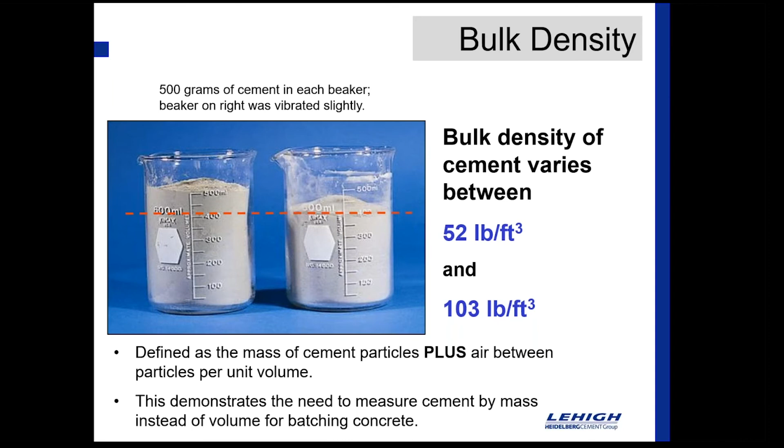And what you saw is that there was a consolidation of about 20%, just knocking the air out of that powder. And so that really begins to confirm for us that when you measure cement, you have to do that by mass instead of volume for batching concrete. You can do the 3-2-1 on shovel scoops if you're filling a mailbox post hole or something like that, but it's not going to work overall in terms of ready mix production.

Particle size distribution is really just a more detailed measure of cement fineness. And I always try to explain this to people like it's almost like an aggregate gradation curve. So it really starts to look at the microscopic components of a cement and break those down into their different quantities. And you're actually starting to see PSDs now more in the everyday cement plants. That used to be something special that we would ship off for analysis. Now you're starting to see that more in plant-to-plant use.

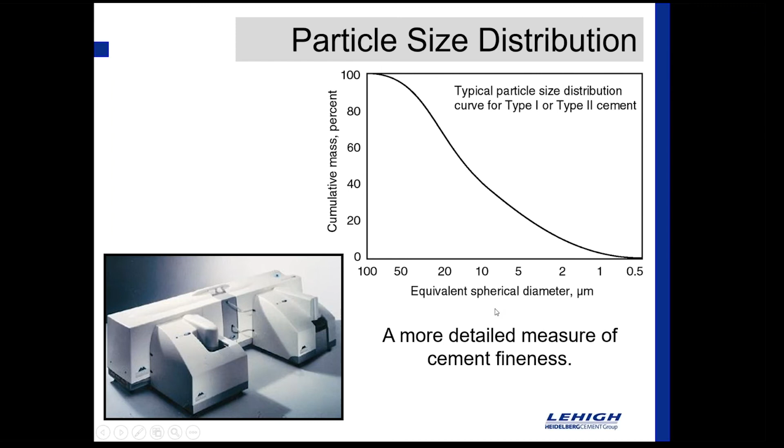Because hydration is an exothermic reaction, that means, again, it gives off heat. We can do some things like measure that heat. And so that allows us to do thermogravimetric analysis, differential thermal analysis, differential scanning calorimetry. These are all things that would be at a research lab or some kind of a national lab for a cement company. Probably not going to see these at an everyday cement plant.

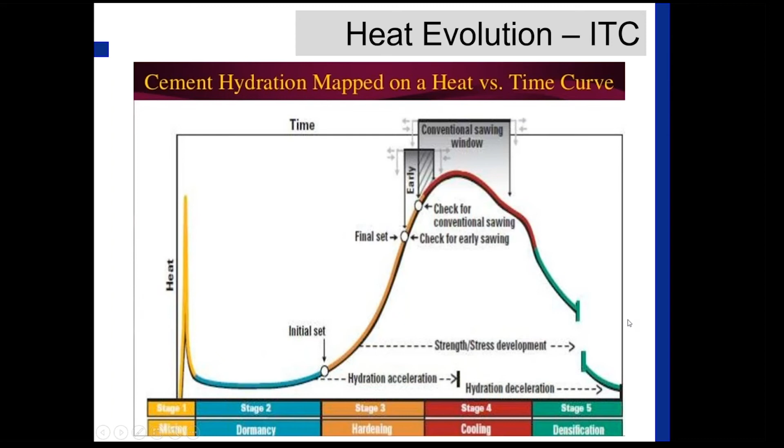And here's just an example of what that might look like if you were to take cement hydration and map it on a heat versus time curve. You can see again that initial spike in heat generation, and then the gypsum starts to control that reaction, and thereon you can kind of go on out from there.

In terms of microscopy, we talked about this earlier, but clinker microscopy provides a snapshot of the conditions inside the kiln. And so what we're looking at here is how well formed are the edges of these clinker minerals, because that gives us an idea again of the actual melt. Was it a thorough melt? Was everything thoroughly melted and recombined in the kiln? And then was that clinker actually cooled properly? Because we want to quench that mineral growth. We want to stop it before it becomes excessively large.

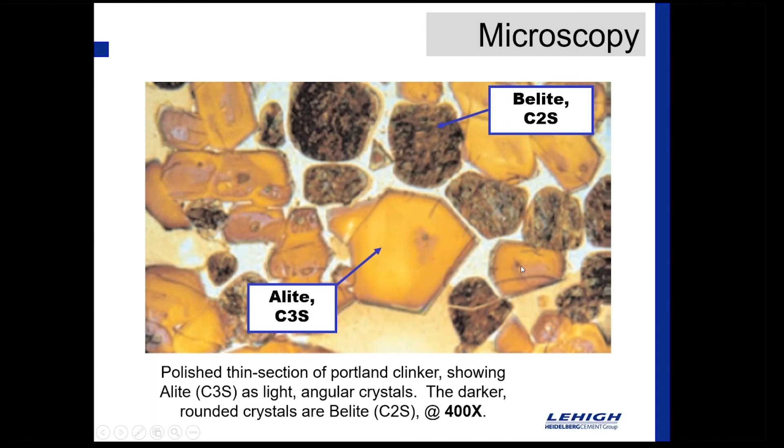And so what we're looking for here is the size of the mineral. These lighter yellow colors, that's the alite, that's the C3S that would give you the early strength. And these darker brown crosshatch, that's the belite, the C2S. And that's about 400 times magnification. We can even take that down to about 3,000 times with the right equipment. And again, we're looking at the angularity of the edges of those particular minerals.

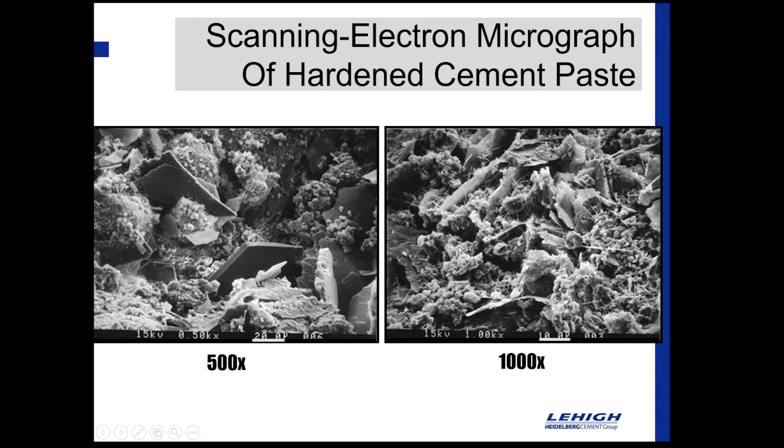You can do things like take a look at the hardened cement paste. This is a picture on the left at 500 times and a picture on the right at 1,000 times looking at that cement paste. And then something that computers have really helped make possible is virtual cement testing. What this does is allow you to play on a computer model with different components to see how those might work out in terms of hydration phases and different aspects of the hydration reaction. You can look at that on a computer model before you go to the lab.

I think at the end of the day, we're all going to want to do lab work. We want to get to the lab and do our trial batches, but I think it helps if we can eliminate some things early that might not be good options for us.